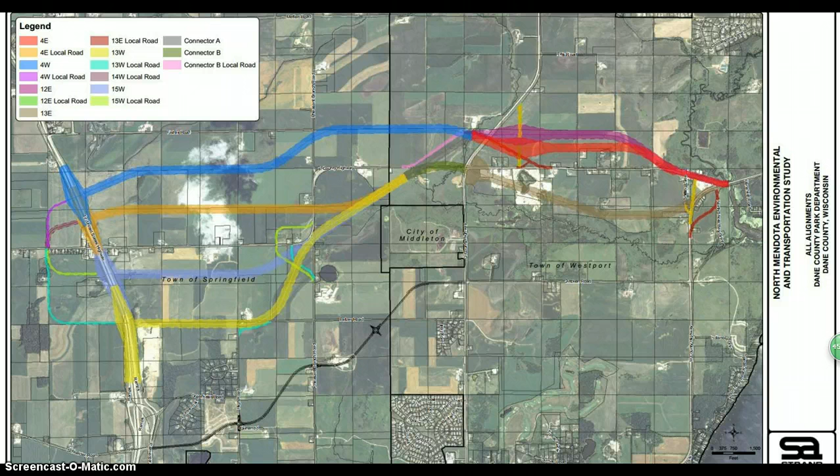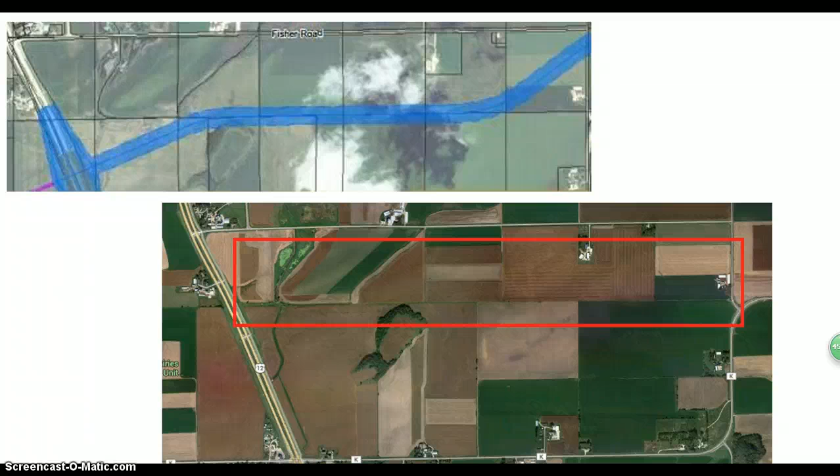The construction site will be south of Fisher Road and mostly flat farmland, as shown in this picture. Based on the North Mendota Parkway Alignment Screening Report, a 4-lane parkway alignment is recommended. We wanted an urban parkway design supported by curb and gutter for drainage. Therefore, we chose a functional classification of an urban arterial with a corresponding design speed of 55 miles per hour.

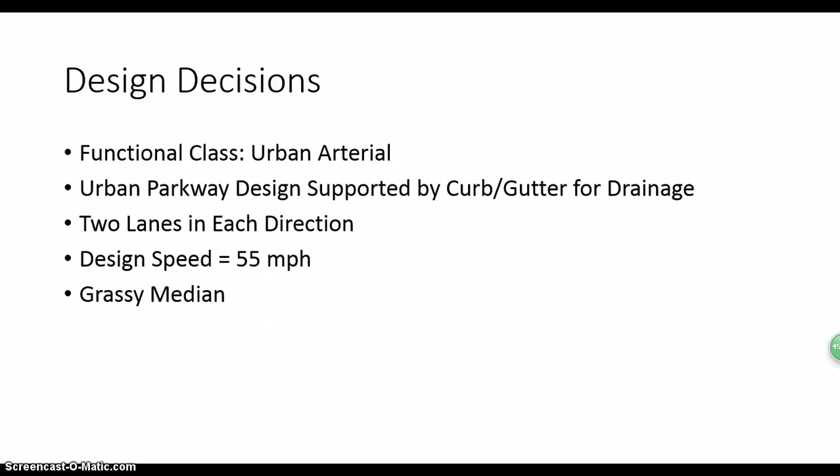A grassy median will not only help for drainage purposes, but it will also aid with the forgiving roadside and clear zone concept. Considering the roadway's categorization as an urban arterial and parkway, we chose cross-sections with features typical to these classifications. For all cross-sections, 12-foot lanes, a 42-foot median, and 30-foot clear zone were used. Instead of having shoulders, we are specifying a curb and gutter.

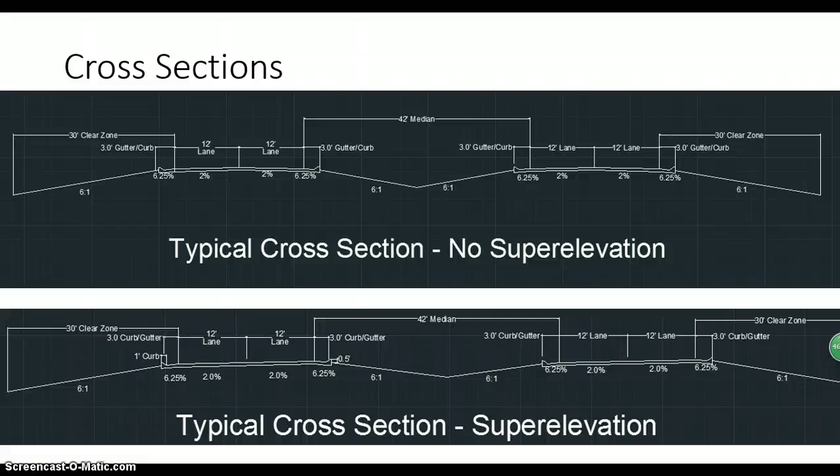The medians and clear zones have a 6-to-1 slope, which is the smallest value commonly used in order to provide the safest outcome for vehicles leaving the roadway. For areas with no superelevation, a normal crown of 2% is used, with this value increasing to 6.25% in the 2-foot wide gutters. When superelevation is necessary, 2 of our horizontal curves use a reverse crown superelevation of 2%, and 1 curve requires 3%. Our cross-section specified includes curbs.

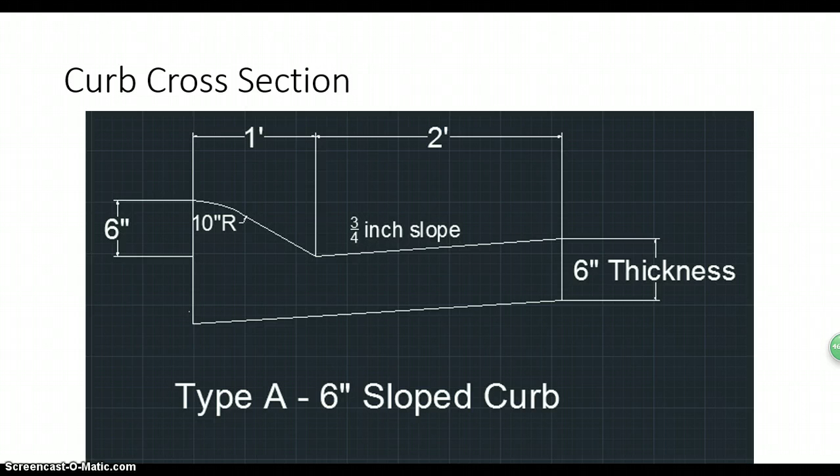Due to relatively high speeds, a mountable curb is specified to avoid sudden decelerations and possible rollover accidents caused by the barrier of an unmountable curb. Because we are expecting vehicles to occasionally leave the roadway, the traditional value of 30-foot clear zone is specified. With the cross-section in place, a horizontal alignment could be designed.

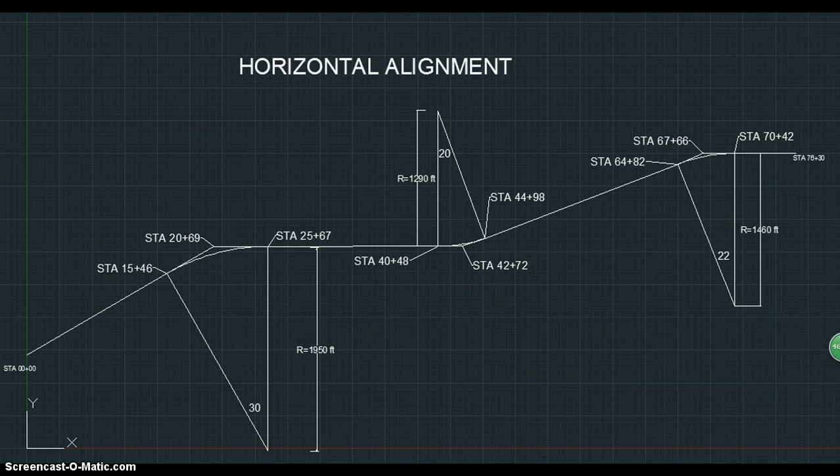Our starting point for design was the 4W alignment provided by Strand Associates. However, this design had to be modified in order to tie into Pheasant Branch Road at a 90-degree angle. Our goal was to provide curves with large radii in order to reduce the rate of superelevation. We also wanted to provide long enough distances in between horizontal curves to meet sight distance requirements.

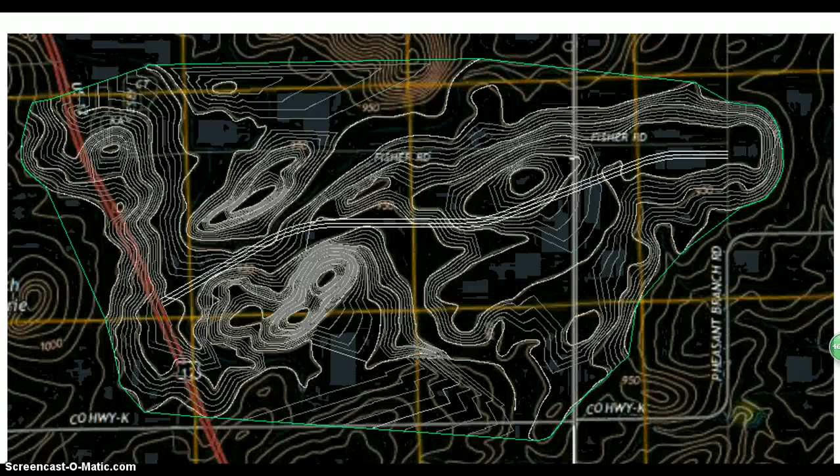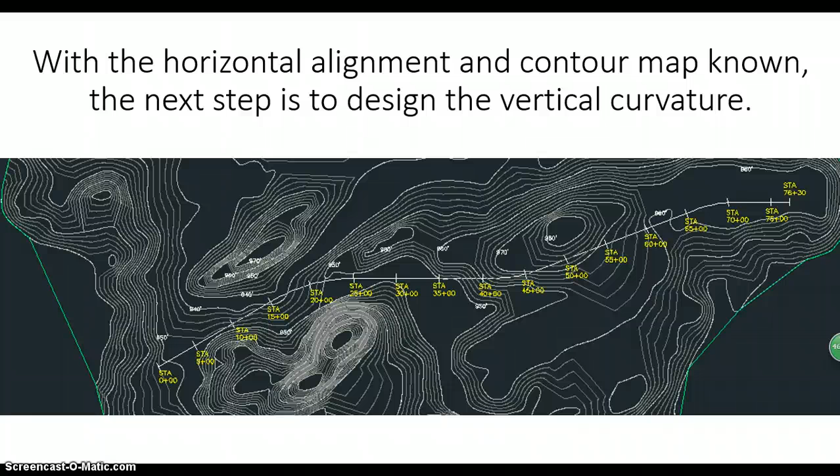Once the horizontal alignment had been decided, a vertical curvature must be designed. A contour map could be generated based on a downloaded USGS map. The existing roadway beneath our horizontal alignment varied in elevation by only around 40 feet, which is quite small compared to our overall length of 1.4 miles. Because of this, very small grades were specified, ranging from the minimum value of 0.5% through 1.5%.

It was important in our design to make sure that our roadway approximately followed the existing topography, but without having an excessive number of vertical curves. Care was given not to place horizontal curves immediately following vertical curves due to limited sight distance, as well as other human factors issues that are important to consider when combining vertical and horizontal curves.

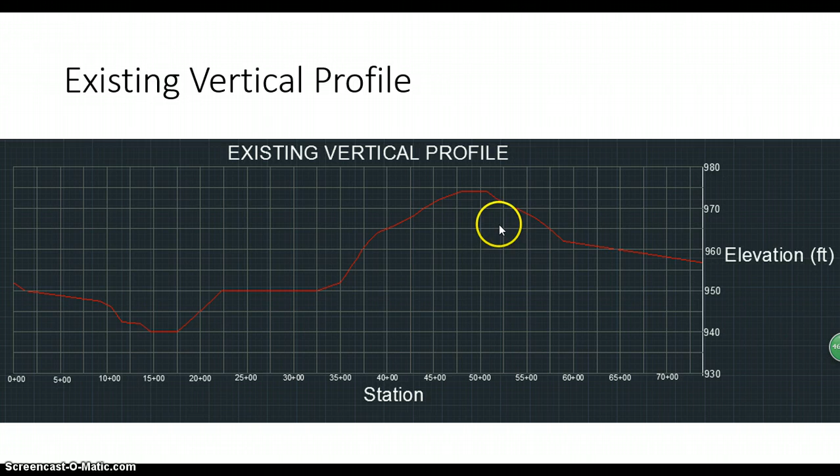So if you look at our proposed vertical alignment, you can see in some spots, maybe about here, we'd have to put a lot of fill material in order to get the road up to this level. And then around over here, we'd have to cut the material to get down for the proposed elevation of right here.

Once the vertical profile was created, a drainage calculation could be made to determine peak runoff rate in cubic feet per second, the number of inlets needed, and the spacing of those inlets. For the runoff rate Q, to use the equation Q = CIA, firstly we need to determine C, I, and A. There are 3 straight segments and 3 curves. Given the length of the segment and the width of travel lanes, we can calculate drainage area.

Then, according to FDM, by using the height of the most remote points and length of segments, time of concentration could be determined. Intensity of rainfall is calculated by using time of concentration from the diagram in FDM. Since concrete pavement is assumed, the runoff coefficient is given from the table in FDM.

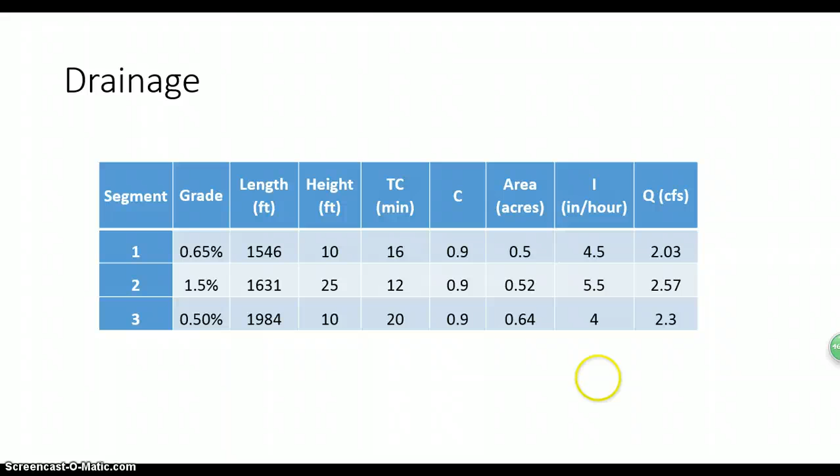Our group was really fascinated by the Neenah Foundry product catalog, so we spent a lot of time searching through all of it and picking the perfect inlets for our road. So eventually we chose inlet type A. We chose the R3010 product. After doing the calculations, we found that the inlets can capture 100% of runoff, therefore we can place them at the maximum spacing, which is 600 feet, while always placing them at the low point of sag vertical curves.

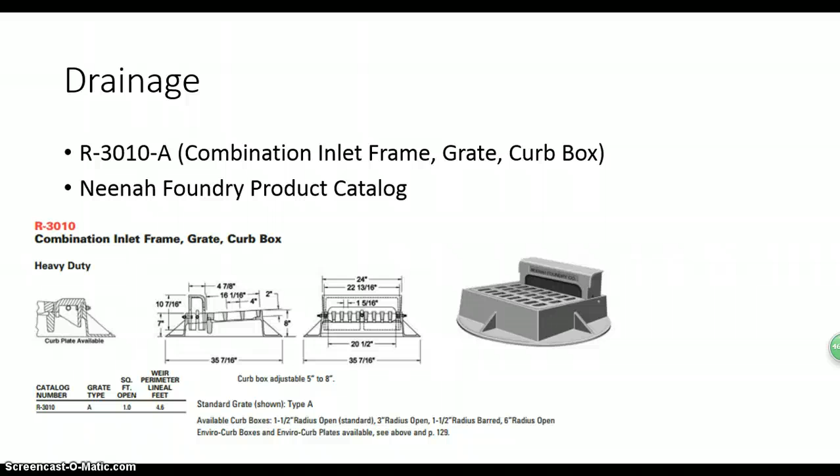So here you can see we plotted our horizontal curvature on the contour map, and you can see our high point is right here at station 4453. So first, if we work from the high point downward this way, if we go from the high point to curve B over here, we have a total of 4 inlets placed every 550 feet, shown in the figure. And then from the low point, which is right here of this curve, which is station 2312, there's another 4 inlets to the beginning of our alignment, spaced every 485 feet.

And then if we go back to the high point and work our way this way, there's a total of 5 inlets spaced every 585 feet, and this is a constant slope for the road all the way to the end until our low point here at 7380. So total, that's 13 inlets on each side of the road, and then they're on both sides, and then there's 2 directions, so in all we have 52 inlets total needed.

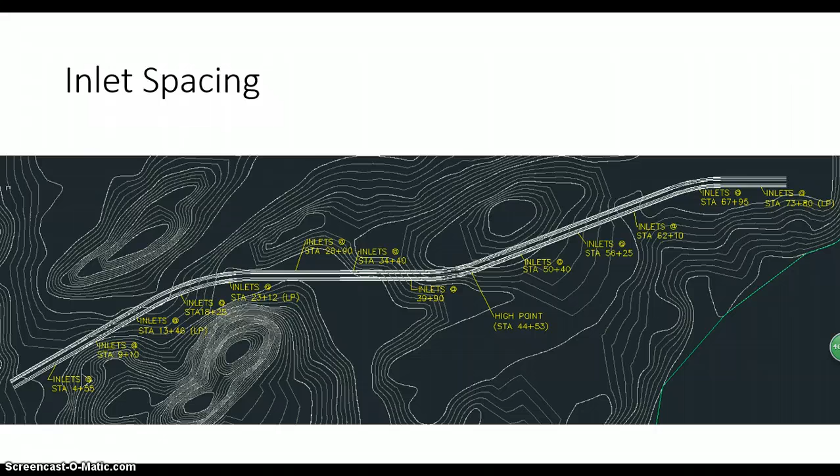So as stated before, our design roadway has 1 interchange and 1 at-grade intersection. Our proposed parkway intersects with Pheasant Branch Road, a 2-lane street with relatively small traffic flow rates. Under the assumption that our design parkway will be ending at this road, a 3-leg at-grade intersection was designed. The design vehicle of the parkway is a WB62 interstate semi-trailer. Due to this vehicle's wide turning radius, 2 corners were created using a 3-radius design, which is more efficient use of paving materials than the constant radius corners.

A semi-actuated signal will be used, activating a green light for the Pheasant Branch Road only when traffic is detected, and giving the green light to North Mendota Parkway the rest of the time. Finally, we ensured that horizontal and stopping sight distances were met, given that this intersection occurs fairly shortly after a vertical and horizontal curve. For the interchange with the existing beltline, a trumpet-style interchange will be used. Note that the left turning movements on the schematic are not shown.

Tapered ramps with a design speed of 45 miles per hour will be used to merge on and off the new parkway. A trumpet intersection was deemed to be the most efficient way to accommodate relatively high flow rates, considering that this will be a busy 3-legged interchange. The configuration is also economically feasible in cost for bridge structures.

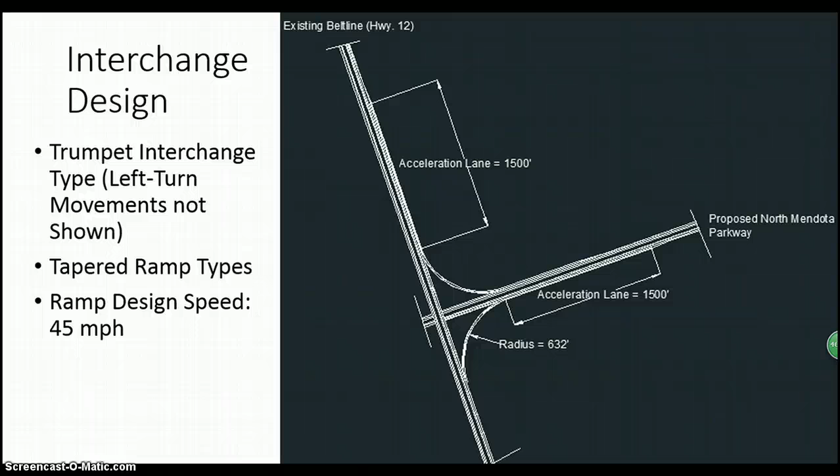Another major factor that influenced our roadway design was safety. Using the WISTrans portal, we were able to analyze crash data for the project area. Because our project designs a new roadway, current crash and traffic data was not available for the exact route. However, we were able to look at crash data on US 12 and Pheasant Branch Road between County Line K and Fisher Road to gain a better idea of the area. From 2009 to 2013, there were a total of 13 crashes on US 12 and a total of 15 crashes on Pheasant Branch Road. None of these crashes were fatal.

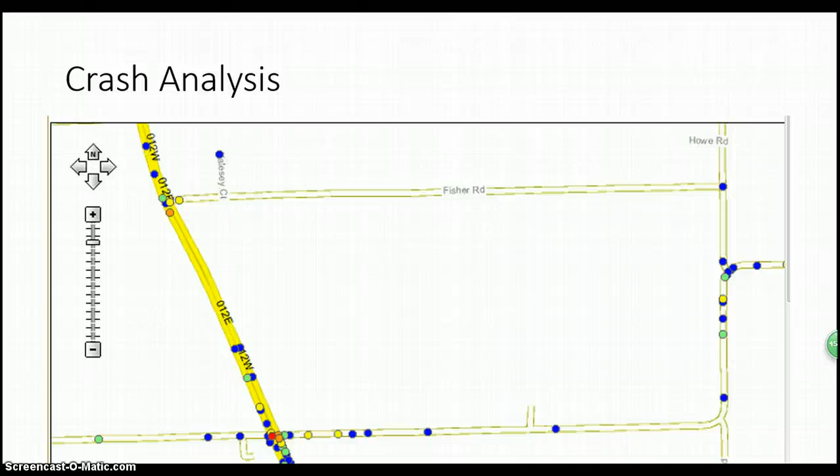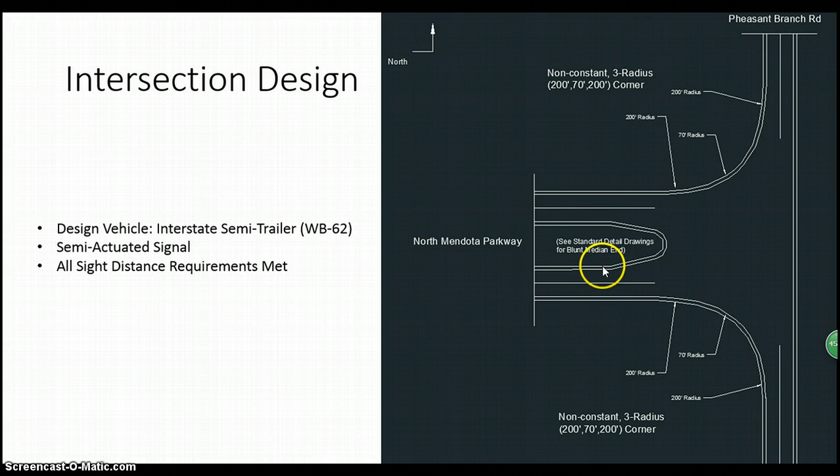When focusing on the crash location, we did notice that there was a pattern for crashes at intersections. Specifically, the intersection of Highway K and US 12 had 38 crashes between 2009 and 2014. The intersection of Pheasant Branch Road and Highway K had 12 crashes between 2009 and 2014. Using this information, we focused on introducing various techniques to increase the safety of our intersection. For example, in order to regulate traffic flow, we included a signal with semi-actuated detectors, with Pheasant Branch Road as the minor road. Additionally, the median provides a barrier for further protection from the turning lanes. The large turning radius also allows vehicles the room to turn safely.

With this being said, that concludes our presentation of the main design concepts of this project.